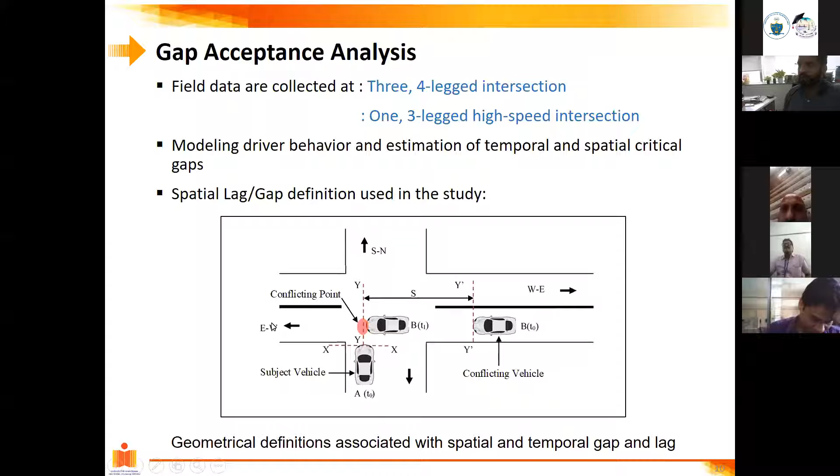Spatial in the sense of space: how far is that vehicle in terms of distance? Now, please understand why people focused on time gaps. A time gap inherently takes care of speed and distance, right?

So when you say some vehicle is going to take 3 seconds or 4 seconds to arrive, that temporal component already takes care of distance as well as the speed of the vehicle. Because if you say within 1 second he's going to arrive, that means he's fast, right? Within 5 seconds he's going to arrive, that means he's slow, or probably he might be at a larger distance.

Now, both the vehicles, if you see, are at different distances, okay? Now, if you see, both the vehicles are arriving at the conflicting point at the same time. I'm repeating again, okay? Both the vehicles are arriving at the conflicting point at the same time. Why is that? Because their speeds are different.

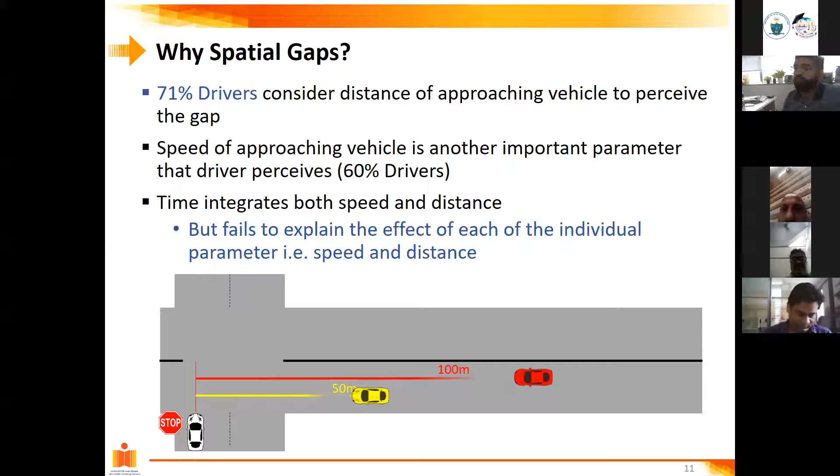Now, how do you do that? It's not that easy. Because finding a temporal gap from a video is quite easy. You fix a camera, then you just find out the time taken by that particular vehicle to arrive at the point of conflict, and at the same time you record the decision of the vehicle at the stop line, whether he or she has accepted or rejected the gap.

So you know the time gap, and you know the decision of the driver, whether he or she has accepted the gap or not. But now you want to record spatial gaps, that too with the speed at which they are arriving. It is going to be tough. Now, how do we do that? There are different ways. We used this approach.

So we recorded videos at different junctions. This is the junction from Kolhapur. It's my hometown, and it was easy for me to take the permissions and collect the data. At this junction, we fixed a camera on one of the buildings, and then we actually marked trap lines on the road.

So we have marked the trap line on the road. Now please understand, when we say we have marked the trap line on the road, that doesn't mean that we have marked throughout the road. We have kept either traffic cones, or we have small white paint on the medians or on the footpath, just to recognize when you look into the video that there is a marking over there, and that marking can be used to actually draw trap lines in your video.

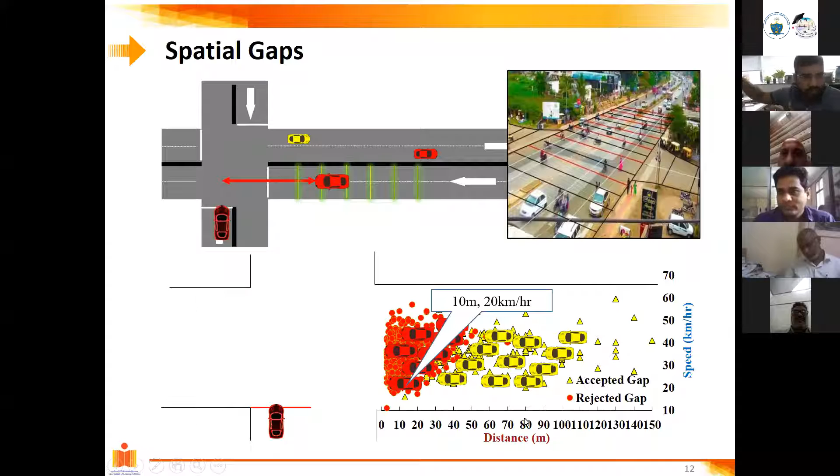Accepted gap means what? Let's take this point: a vehicle was traveling at around 55 kmph and was at 80 meters. There is a vehicle on the approach on a major road which is at 80 meters and traveling at 55 kmph. That gap was accepted by this vehicle. Please understand, this decision is for the vehicle on the minor road. So the data will look like this.

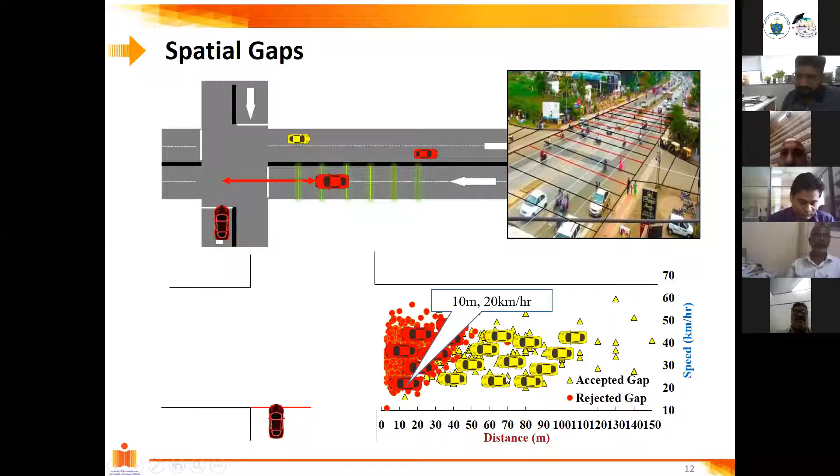Now there are certain complexities when you come across different types of intersection. The first complexity is whether that intersection allows to accept the gap in different stages. It all depends upon whether there's a refuge area at that intersection. What do you mean by refuge area? Suppose you have this median in between. This is the area where vehicles can stop, and they can look for the gap on the left side.

So suppose this car, this subject vehicle, is traveling. First you will go like this. You'll accept the gap by the vehicle coming from the right side. Then you look to the left side and then you will cross the second lane. Now this is very important. If this refuge area is absent, then you have to look for gaps on both the sides. The situation becomes complex, and the driver gets jumbled as well.

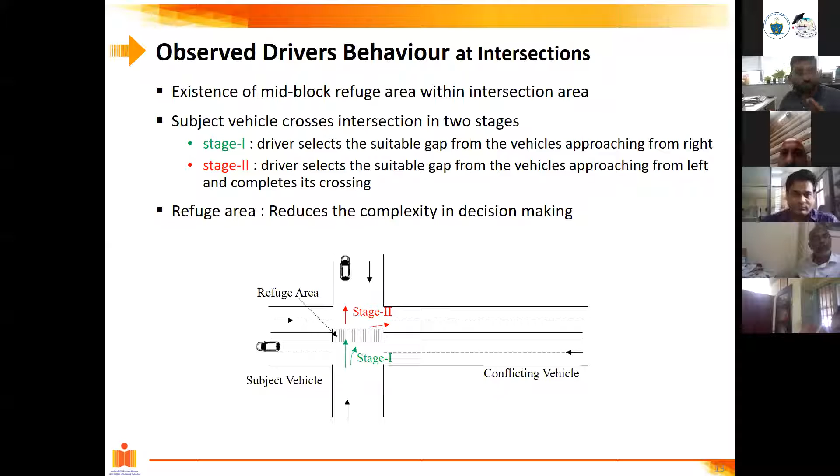You might have seen it generally happens when these kinds of intersections are there on a road network. So you have to be very careful. So we have studied only those intersections which have a refuge area. Now we want to model the gap acceptance behavior. A very simple approach is using logistic regression.

Okay, so it's a binary logit model. Now what is a binary logit model? I think most of you know already, but I will quickly explain it to those of you who probably don't know. Now in a logistic regression or a binary logit model, we talk about what is the probability of accepting the gap or rejecting the gap. What is the probability with which a person is going to accept or reject a gap?

If you're traveling, you come to the intersection, and now you want to decide whether you want to cross or you want to stop at the intersection. Now this decision of yours depends upon various factors. What are those factors? First of all, what is my age? If I'm an old guy, say 70 plus, my decision making would probably be safer. I might think I should wait for a safe gap, a long gap. If I'm a young-blooded guy and just a new learner, I might be a rash driver. I will look for a small gap and suddenly cross.

So it also depends upon the socio-demographic characteristics of the person. Socio-demographic characteristics include my age, even my income. Now you might ask me, sir, how is income correlated to this? Let's talk about that at a later stage. It depends upon my family. Suppose I have my own 5 kids. I might think, no, my wife is waiting at home, my kids are waiting at home, I need to drive very safely.

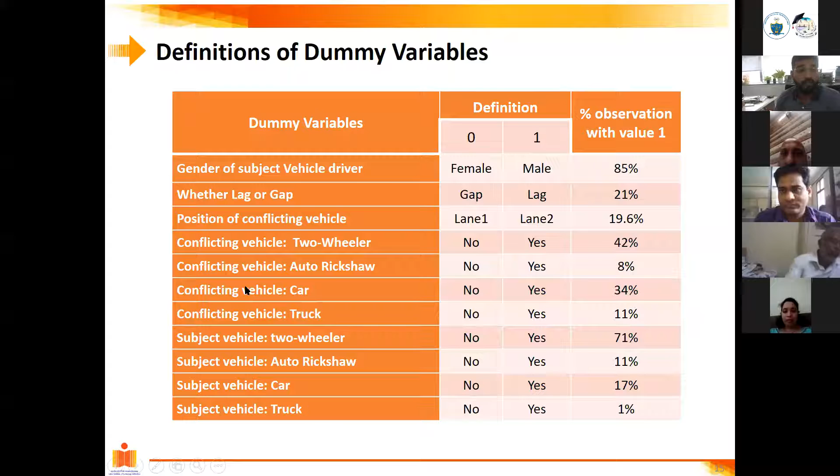Now coming towards the modeling part. When we develop the models, we try with a very simple model. The first thing when we do modeling, we try to understand the correlation between the variables. This is very important, how these variables are correlated to each other, because you don't want to keep two variables which are highly correlated. It doesn't make sense, right? If one variable itself is taking care of the model, why do you want to have a second variable? It's unnecessary and it's difficult to account for as well.

Because the more complex your model is, please understand, nobody is going to use your model. Everybody would like to have a simple model which has variables which can be easily accounted for. Suppose I have a very simple model which needs only one variable. Let's take a random example. You want to find out your income. I'm not doing any kind of Vani Jyotish or what. You want to find out your income after 30 years, and it is completely based upon your income at this stage.

And the model gives the result at 99% accuracy. If I just give my present income, it gives what will be my income after 30 years. Good, everybody will put his present income and try to find out what his income will be after 30 years. But generally it's not that easy. There are various factors which are going to influence all these things, and that's why even modeling becomes difficult.

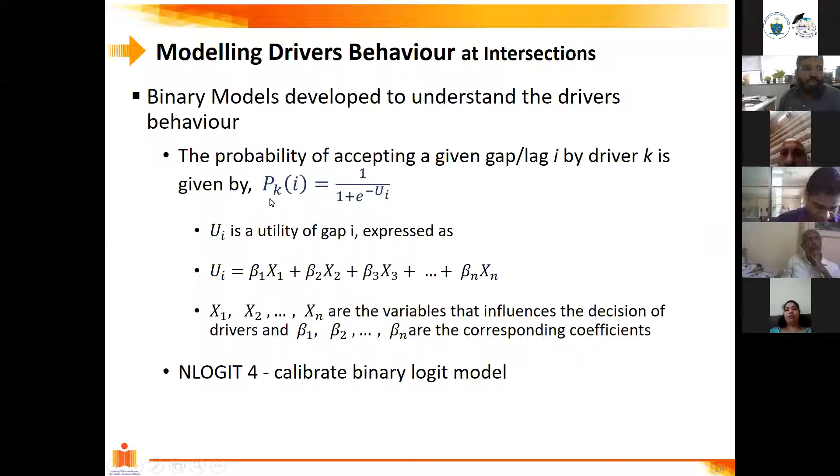Now, second model, we have split time into distance and speed. Now it's very interesting again. Look at this model, very simple model. Please understand this Ui is the utility I was telling, and this Ui comes here, because this is the utility equation. You get a number here. It can be any random value. You put this value here, and then you get the probability. Of course, we all know probability ranges from 0 to 1.

D is nothing but distance. Distance has a positive and significant coefficient, whereas speed has a negative and significant coefficient. Now, what does it mean? Distance positive means the more the distance, the probability of accepting gap is going to increase. Simple, common sense. Minus sign for speed clearly indicates that if the speed of the approaching vehicle increases, the probability of accepting the gap is going to decrease.

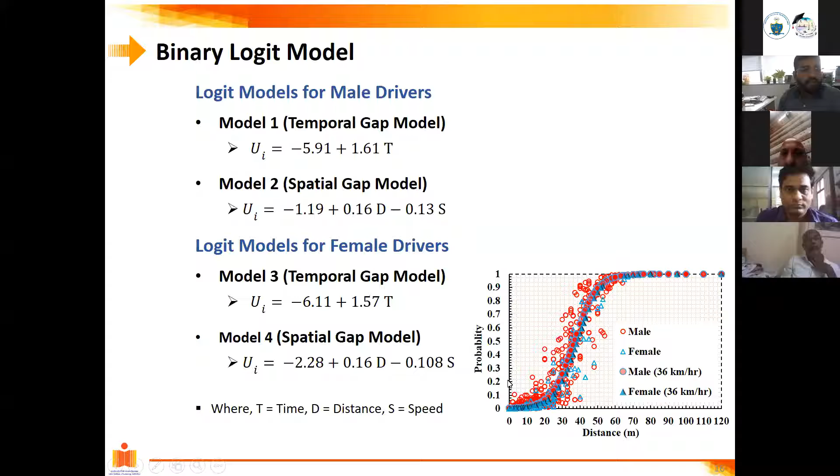Whereas for 60 meters, the probability almost hits 90%. So very simple. That's the beauty of the logit models. You get to know what is the probability of accepting or rejecting a gap for a given variable. Now I'm going to show some complex models. This is the model exclusively developed for two-wheelers.

Now very interestingly, we have observed in the case of two-wheelers, let's look at this model. Suppose a two-wheeler is trying to cross the intersection. Understand this, I'm explaining to everybody. Utility is nothing but a random value you're going to get here, but once you substitute this UI value in the probability, you are going to get the probability. Now let's understand this. What I'm saying is,

this car is nothing but the approaching vehicle, but utility is for the crossing vehicle. And which is the crossing vehicle? Two-wheeler. So we are showing these models for crossing vehicles, for subject vehicles. Now if the two-wheeler is the crossing vehicle and the approaching vehicle is a car, look at the coefficient, it's minus, which indicates that if the vehicle on the major road is a car, the probability of accepting the gap is going to reduce. Similarly for truck also, the probability of accepting the gap is going to reduce. Why? Because you are a two-wheeler rider.

So this also indicates that generally whenever a car or a truck is approaching, two-wheeler riders are more cautious, and that is quite true. It may not be true in some cases. Sometimes you might have seen two-wheelers are quite aggressive as well. They just quickly move. But the model clearly shows that the bigger the size of the vehicle, the probability of accepting the gap is going to reduce.

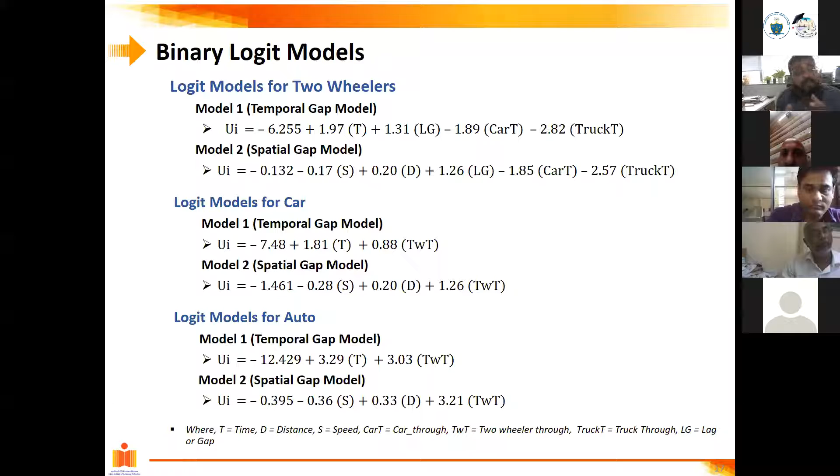Interesting. Now look at the second model, developed for car. It shows a positive and significant coefficient for two-wheeler. That means if the approaching vehicle is a two-wheeler and you are in the car trying to cross the intersection, your probability is going to increase because you are going to dominate over that two-wheeler. And generally that happens. When you are in a bigger vehicle, you generally dominate over the smaller vehicles. So even this kind of behavior can be captured in the models, and we have captured it.

Just to give an example in layman's language, let's see a very simple graphical representation. Two-wheelers and auto rickshaws accept smaller gaps than cars, and this is very true. Many times you are waiting in the car at an intersection, and suddenly a two-wheeler fellow comes beside you and crosses the intersection, but you are not able to cross it. You might have observed this. Or suddenly an auto rickshaw fellow comes and crosses the intersection, but you don't, because you are in a bigger vehicle.

So just to give an example, let's take a gap value of 45 meters. For a 45 meter gap value, the probability of accepting that gap for car, which is this blue, is just close to 10%, 10-11%. But for the same gap value, the probability of accepting the gap by a two-wheeler or an auto rickshaw is almost 80%. And that is true.

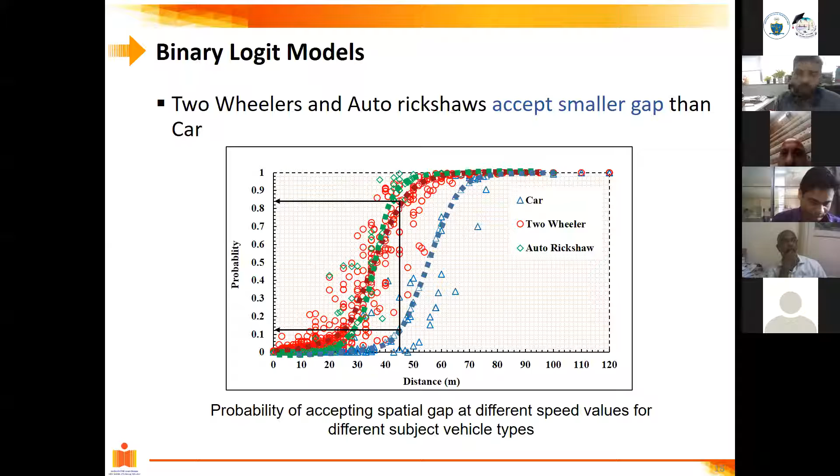In India, auto rickshaws and two-wheelers are quite aggressive. I think most of you people drive also. You have seen two-wheelers and auto rickshaws are quite aggressive while driving, right? So this is also captured in the models that we have developed. Then we talk about lags and gaps.

I told you initially what we mean by lag. Lag is nothing but the first gap. Now, if I take a lag of 4 seconds, the probability of accepting a lag is slightly higher than the probability of accepting a gap. There is a reason for this. I'll explain. Lag is nothing but the first gap. Quite often, whenever you are approaching the intersection, you are already in a state of motion, okay?

And then you are already making a decision. Now, there is a difference between a decision-making process when somebody is stopped and when somebody is already in motion. Now, what happens, that motion gives you a confidence that you can easily cross that intersection. That means you can quickly cross that intersection because you're already on a bike or in a car, you're already moving. You look for a gap, you look for a vehicle coming. If you're already moving, suddenly you tend to cross.

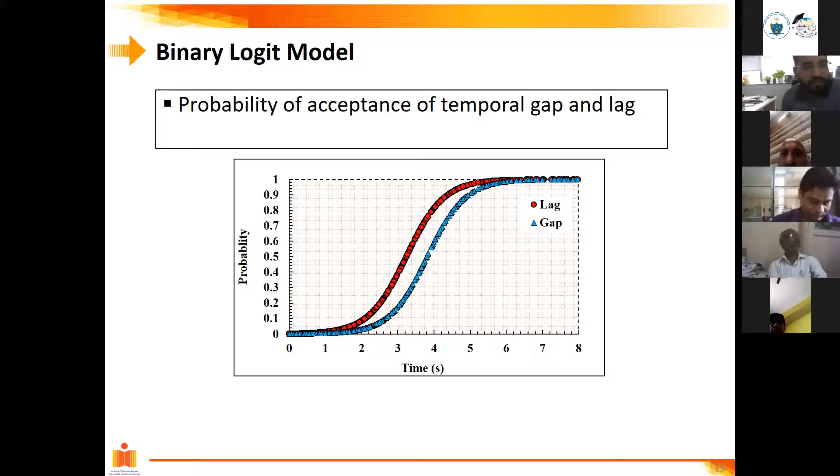So that's why the first gaps have to be treated differently, because quite often the vehicles are already in state of motion. But in case of stopped vehicles, a person has to start the vehicle. You have to put in first gear. If you're on a two-wheeler, you have to put a first gear, then you have to accelerate. So you have to think of all those dynamics, okay? And the decision-making process completely differs when you're already in state of motion. That's why we analyze this gap acceptance behavior separately for lag as well as for gaps, okay?

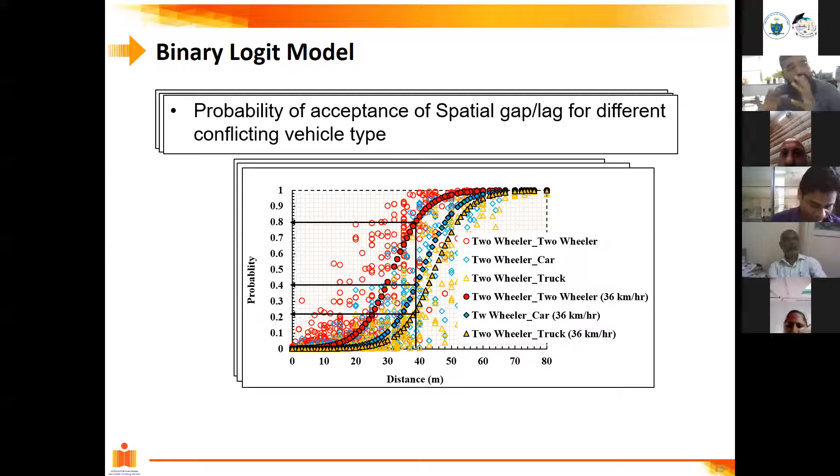So very important. Now let's go to the spatial gap acceptance with respect to vehicle interaction. This is very interesting, okay? Now when I talk about vehicle interaction, what exactly do I talk about? I talk about interaction between two-wheeler and car, two-wheeler and truck, two-wheeler and two-wheeler, and so on, okay? So for example, if a two-wheeler is waiting and the oncoming vehicle is also a two-wheeler, then what will happen? We have shown here in this graph. If a two-wheeler is waiting and then a car is coming, then what will happen? So these kinds of interactions can also be modeled, okay?

Now, we understood that gap acceptance behavior is all about all these aspects, okay? Trying to understand what size of gap is acceptable, what size of gap is not acceptable, and so on. Now there is one size of gap that is very important for us, and that is called the critical gap, okay? Now theoretically, I am not saying practically, theoretically critical gap means it's one size of gap which is acceptable for most of the population. Means what? Means if I tell that 4 seconds of gap is accepted by all the population, I will call that gap value a critical gap.

But then how do you arrive at that critical gap value? How do you arrive at that single value? Now there are several ways of doing it, okay? There's Raff's method, given by Raff, and he has given this close to the 50s, 1950. It's an old method. Thereafter people used logistic regression, people used the maximum likelihood method. Recently we came up with our own method, which is based upon support vector machines, okay? Very interesting. I'm not going to cover that part though.

So I'm going to tell you what is critical gap, okay? So it's a size of a gap whose number of accepted gaps shorter than it is equal to the number of rejected gaps. So this is the definition given by Raff. Now what he says is, I'm simplifying. Look at this graph, okay? It's the intersection of the rejected gap graph and the accepted gap graph. He defines it in such a way that it is the point where the number of accepted gaps is equal to the number of rejected gaps. Very simple. See how nicely it has been defined.

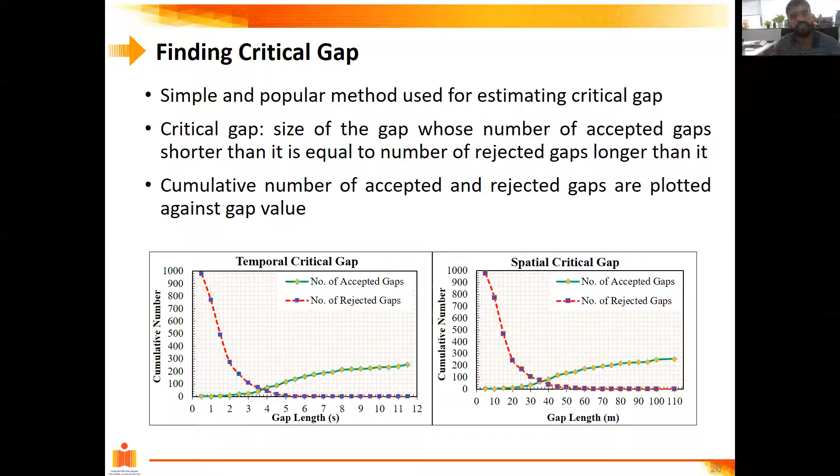If you talk about intersections on national highways, those intersections can be called high speed intersections because vehicles are approaching at higher speed. But our intersections were low speed. That's why if you look at the gap values, they are quite smaller: 3.8 seconds and 36 meters. Now these are the models which we developed. I explained this model to you.

In the previous models, we just accounted for a single vehicle type. But in these models, we have accounted for the interaction between the vehicles, meaning two-wheeler interacting with truck, two-wheeler interacting with two-wheeler, two-wheeler interacting with car. Even this kind of model can be developed.

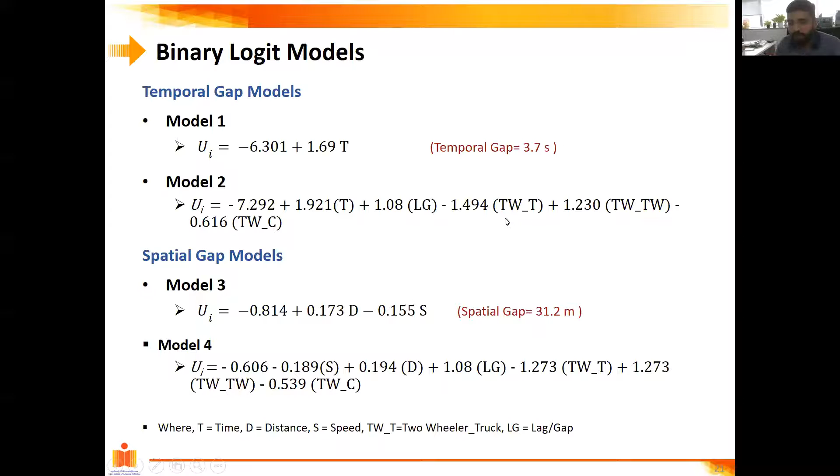And then when you actually use different techniques, there are different values you will come across. But more or less, the average value would be similar, even by using different methods. Sometimes it may vary. Then you need to look into why that is happening. So we used different techniques. We used Raff's method, logit method, maximum likelihood method, and then we found this is the value of the gap.

Then let's find out which value is the best. That is again based upon the literature review. You try to see which model is more reliable, and then you select that. So we chose 3.68 seconds. Now, the Highway Capacity Manual, the manual given by the US, gives values of 5.5 seconds and 6.5 seconds. So look at our values. Our values are quite less, almost 1.5 seconds less.

That means our drivers are quite aggressive. And it's true actually, Indian drivers are quite aggressive. That's why it's very important to understand the gap acceptance analysis.

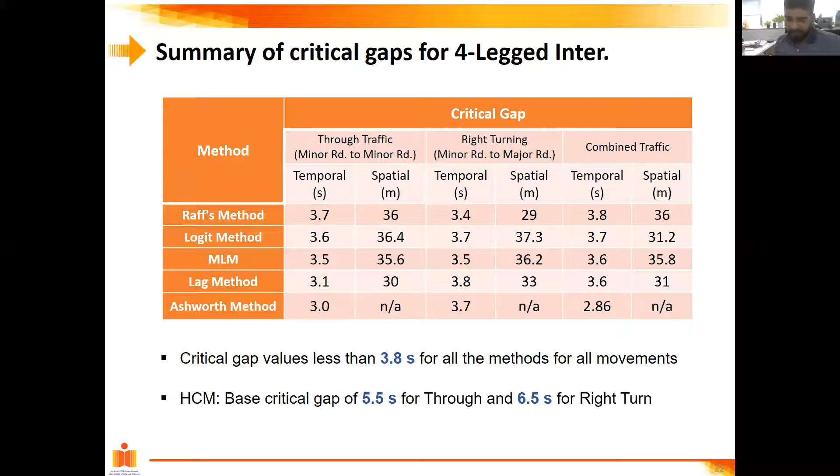Now I have a video to show. I guess I won't be able to run the video. Maybe once I finish, I can show this video. Hold on for some time. Rajan, can I share a video? Yes, sir, you can share. Rajan, how much time do I have? We have 20 minutes. Perfect, that's good enough. You will have to share the screen again. Yes, I'll do that. So Rajan, now is it visible?

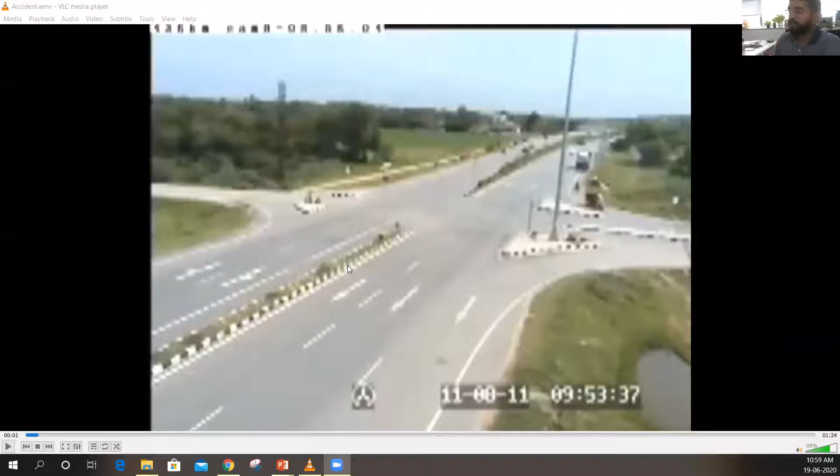Yes, it is visible. I think this video is quite famous. Some of you might have come across it. It's not clear, but still I will play this video. It may be slow in some of your cases. Now look at this. There's a two-wheeler coming from this side, and there's a car coming from this side. This is captured on a CCTV camera. And look at it. A vehicle coming from the wrong side, completely judging the gap in a wrong way.

There was a two-wheeler coming from this side. Now look at this two-wheeler. He's trying to cross and he misjudged the gap. Again, there was an intersection. Now look at this bus. This bus is trying to cross. He did not judge it properly. There is a complete collision, there is a crash. Look at this two-wheeler trying to cross. There's a crash. Trying to cross.

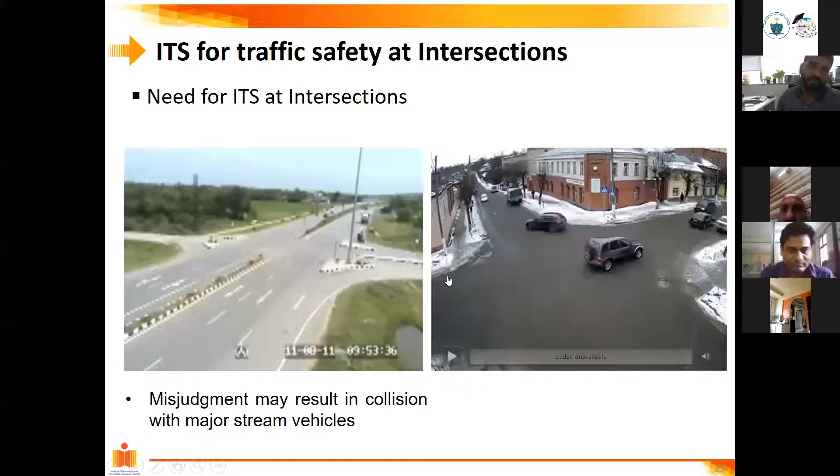Has it? Yes, sir. So all these crashes are at intersections, and they are crashing into each other. This clearly indicates that intersections are complex. The decision making at intersections is not that easy, and therefore we need to give some assistance to the drivers when they come across intersections.

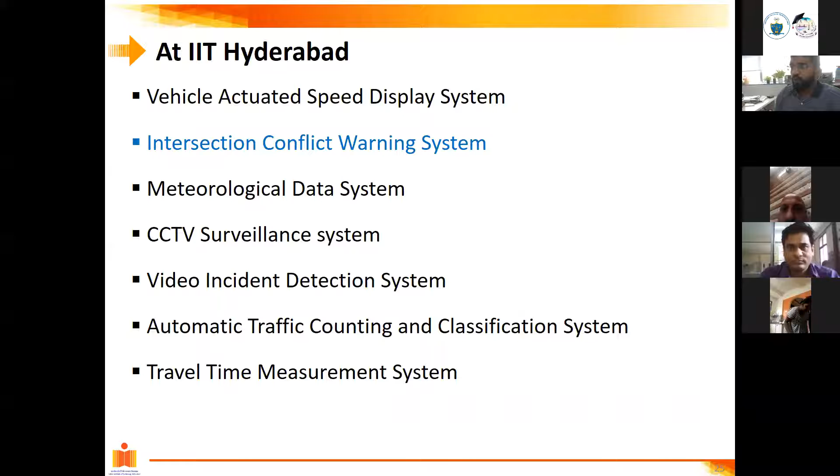Now there are of course several ITS applications. One such application is the intersection conflict warning system, where you warn drivers in advance whether to cross or not based upon detection. You detect the vehicles on the approaches at the intersection, and then you give this information to the driver on another approach. So, several ITS technologies that we have deployed.

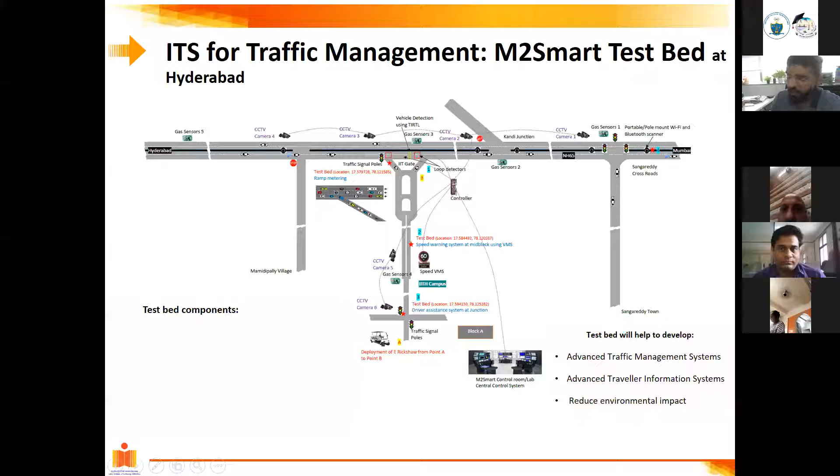And then inside the campus, we developed an ICWS, that is intersection conflict warning system, which I'm going to talk about. So this is the intersection, one of the intersections inside the campus. What we have done is we have come up with new signages. We assured ourselves that it won't deviate from the standards given by Indian Roads Congress. So we maintained those standards. Add on to those standards, we have used some text messages to inform drivers about the vehicles on other approaches.

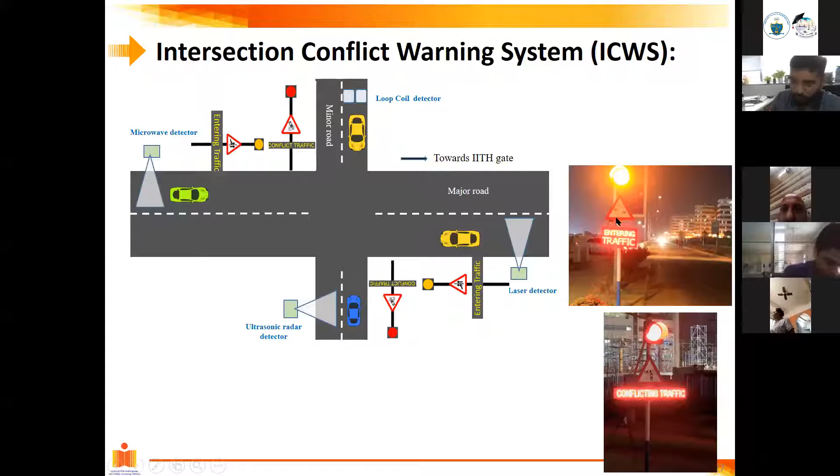Now there is a difference between these two signages. One is amber, one is red. Red is for the minor approach, amber is for the major approach, because we don't want the vehicles on the major road to stop. This is how it looks in reality, in the field. It warns you in real time.

And as I said, while merging on the highway, this is the National Highway 65. This is our road which is merging. It's a ramp which is connecting to the National Highway. If you look at this, there is a detection system which we have deployed on the National Highway.

It is based upon the loops. It's a loop detector. You can see here we have laid the loops on the road. Once the vehicle arrives on this, okay, it will detect. So I can actually show you in real time also.

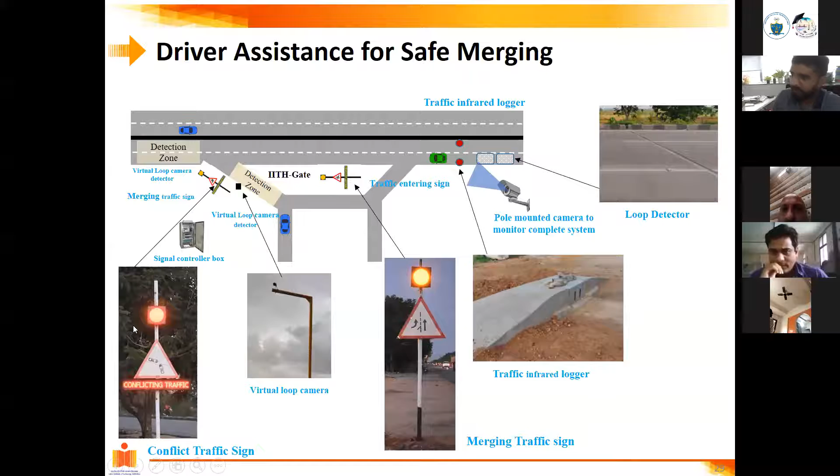I didn't think of this. Suddenly it came in my mind that I can actually show you in real time as well. So let's see in real time also. Give me some time. First, let me finish this part.

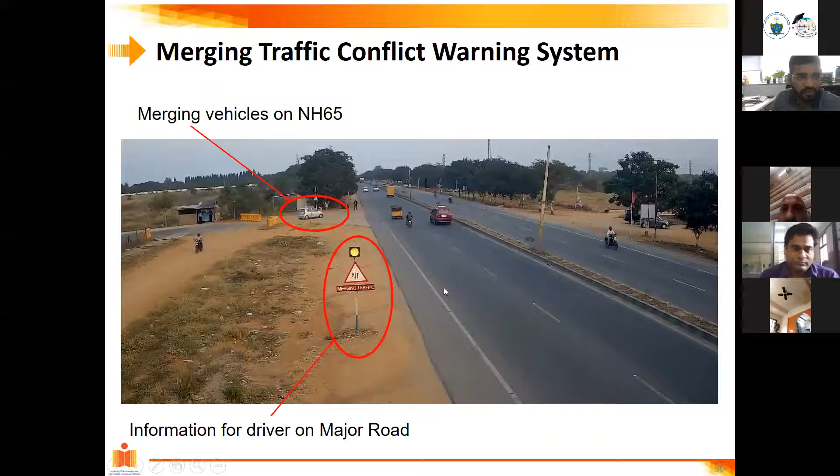So this is how it looks. This is the National Highway, okay, and there's a vehicle actually entering onto the National Highway, and it warns in real time. It tells all these vehicles that there's a vehicle actually entering. So it's a cautious message to the vehicles on the National Highway as well. And I will show you how it actually looks like.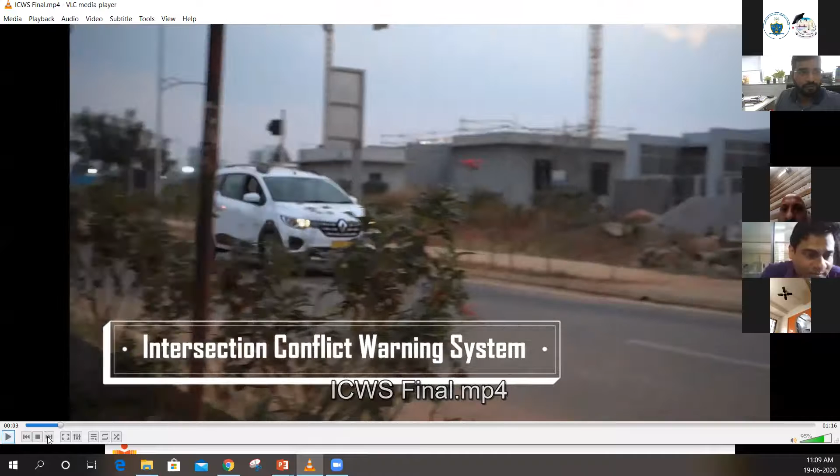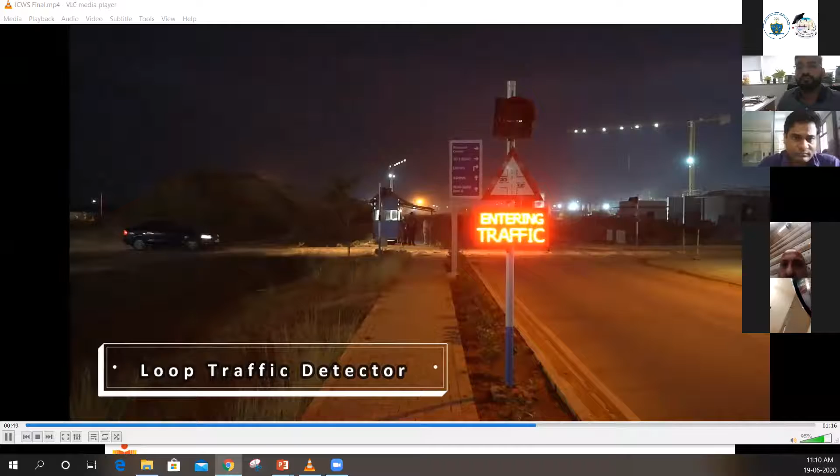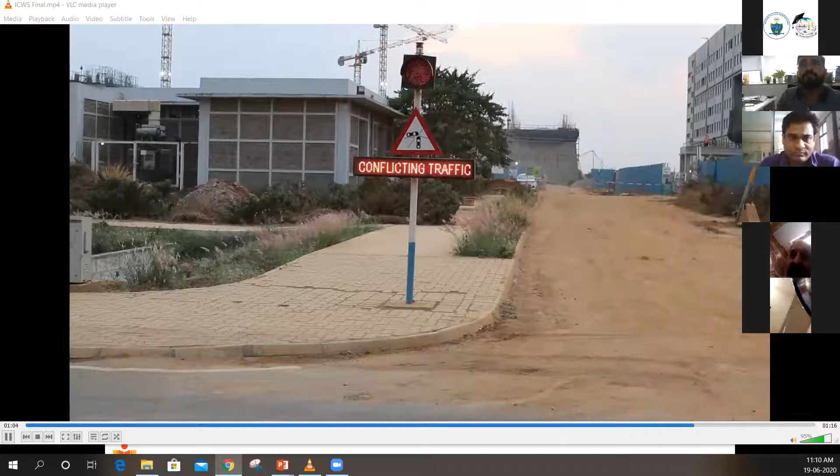So Rajan, is it visible? Yes, sir, it is visible. Yeah. Yes. Yeah, so just a minute, Rajan.

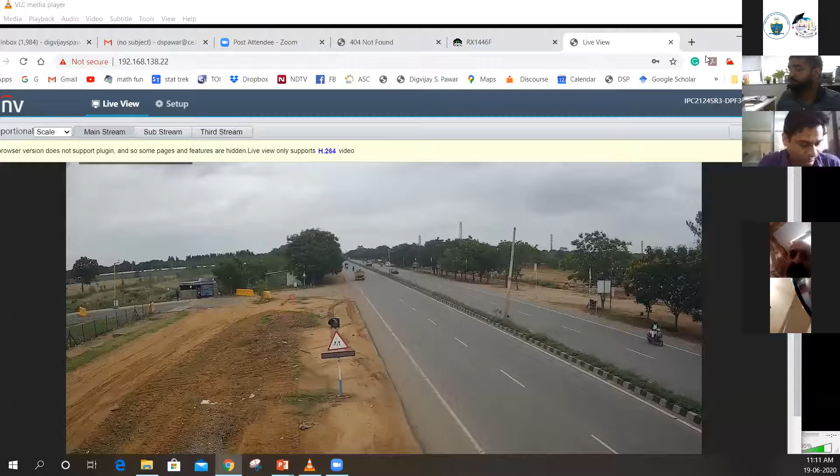I'm trying to access the CCTV camera live, okay, so that I can give them the demo. So this is a live video, actually live feed. Okay, I'm accessing from my office. Are you able to see, all of you? Rajan, are they able to see? Yes, sir.

It is visible. Yeah. Now, on the same highway, actually, day before yesterday, we had an accident. One truck fellow went onto this pole. He's saying that he was sleepy, and he completely went onto this warning system, and then again we erected it. So we have also deployed one sensor on this national highway.

Here there's one sensor called as Turtle, which is based upon the laser technology. I'm accessing that as well live, and I'm going to tell you how it detects the vehicle. So this is how it detects the vehicle. See, all of you try to see this carefully. So this is the count. Currently, vehicles are passing on the highway, and you can see there is a count on the highway.

Can you see, just now a two-wheeler passed? The speed of the two-wheeler was 42 km/h. It's live streaming. Okay, it's streaming live now. But I can just cross verify this. I can show you even with the video on. So let me do this thing. I will keep video on one side.

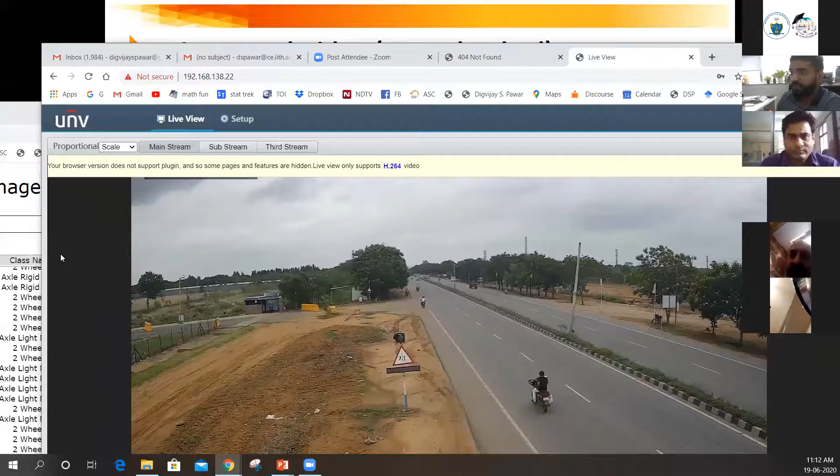Can you see both my videos? Both this thing? Rajan, can you confirm? Rajan, sir, is it visible? Yes, sir, it is visible.

So for example, this two-wheeler is going from wrong side. See, this two-wheeler went from wrong side. So here it will come, two-wheeler. Look at this arrow direction. It is on wrong side. Can you see that? And it traveled at 53 km/h. That speed he is traveling.

Now, for example, car went, see, light motor vehicle. And you can find out even speed. The car went with 63 km/h. Then, see, there is a three-wheeler, means rickshaw, and there's a two-wheeler. Again, one two-wheeler went. Again, two-wheelers went. See, you can see here their detection.

So it's currently online. I'm actually showing you in real time the detection, the speeds, in which lane they're traveling, in which direction they are traveling, everything can be detected. So this fellow went very high speed. Can you see that car just went? It went with almost 100 km/h. You can easily see that. Look at it.

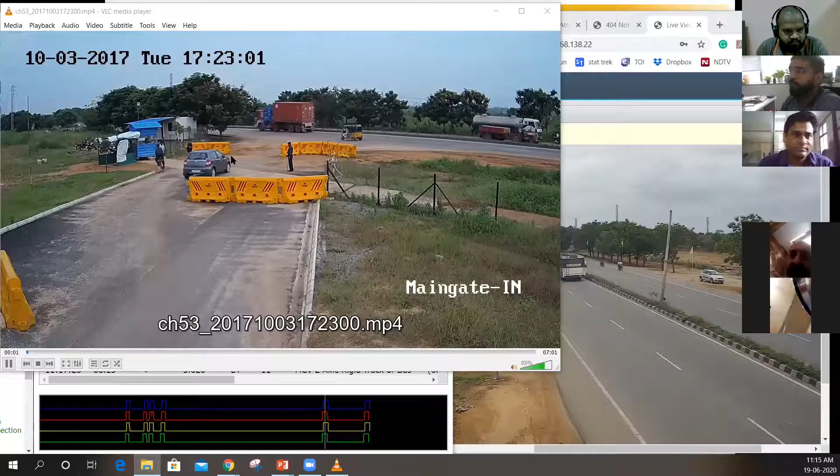So this is the accident which happened while exiting. Okay, I don't know if it is wrong direction or what. This merging happened very drastically, and suddenly that rickshaw toppled. You can see there's a rickshaw which came and it toppled. There was an accident here. Okay, so there's a problem with the merging. Okay.

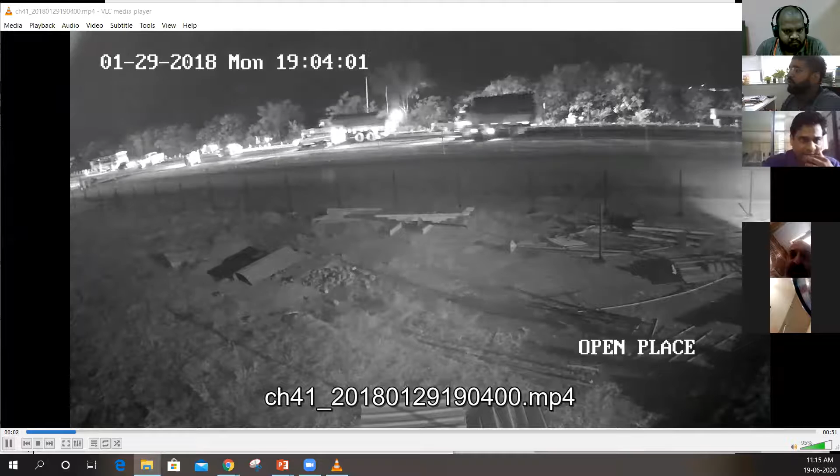So there's a nighttime one; what happened is one fellow actually crashed onto pedestrians. Okay, so we are actually able to track all the accidents in live. Okay, so for example, now let's see a wrong direction accident.

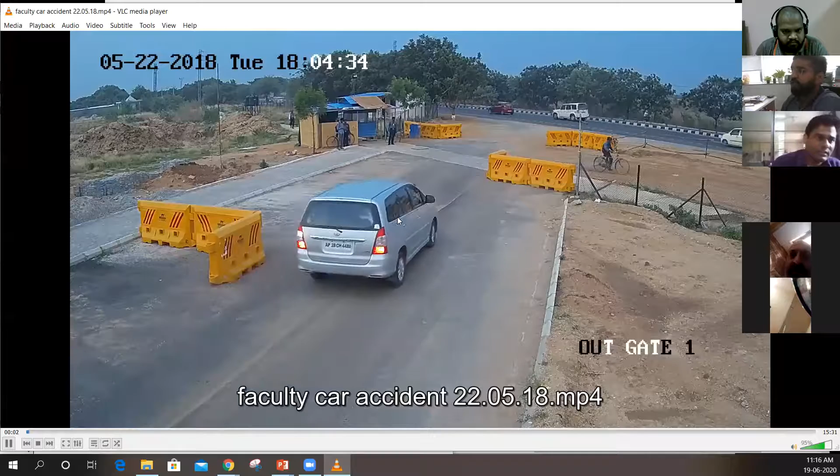Okay, so this is the vehicle which is trying to cross, and now there will be another vehicle which is coming from the opposite side. See, there's a vehicle which came from the opposite side, and then there's an accident on the highway. This is on the highway, by the way. So like this, you'll come across several incidents which you need to capture and you need to understand.

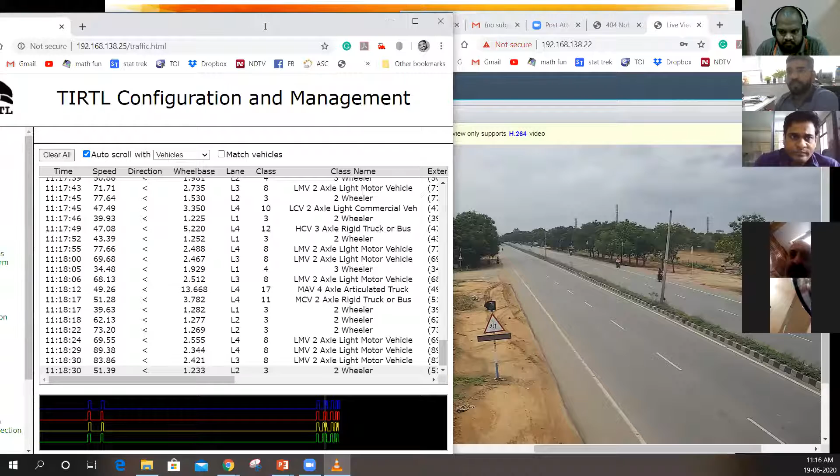Okay, so now this is how it works in live. I told you about vehicle tracking. Looks like there is no vehicle exiting from the campus, and that's why this is not on. But this is how it works actually. So you can see here one pole. Can you see, all of you? I don't know if it's visible on your screen or not, but there's a yellow pole here. And this pole is actually fitted with one sensor at the top. This is a virtual loop detector.

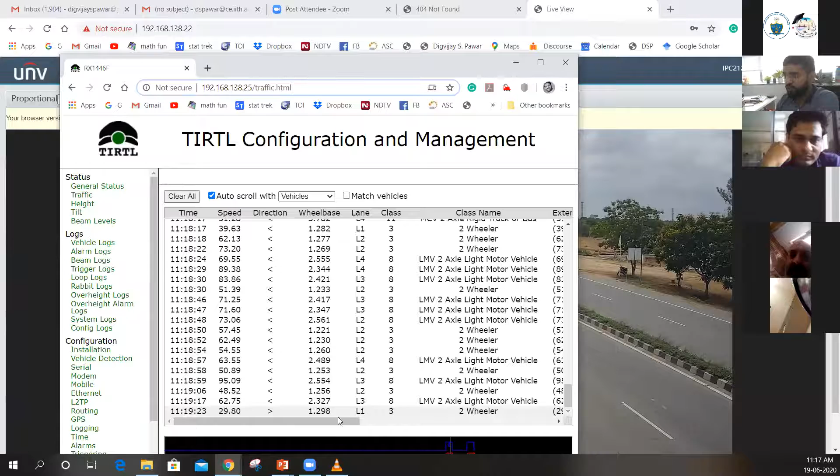Now this sensor detects the vehicle which is coming from this side and actually displays it here. Okay, so see, this is again one fellow going in the wrong direction, and he will be detected here. See, this two-wheeler went in the wrong direction. See, this arrow changed. That means this two-wheeler went in the wrong direction. Speed was 30 kilometers per hour. So likewise, you get to know several things. Okay, I'll move on to the presentation part.

See, this vehicle came and now it is blinking. Can you see that? In the video it is not clear, but this vehicle came and it started blinking. It may be visible to all of you. It is blinking because this vehicle is merging, because it is detected actually.

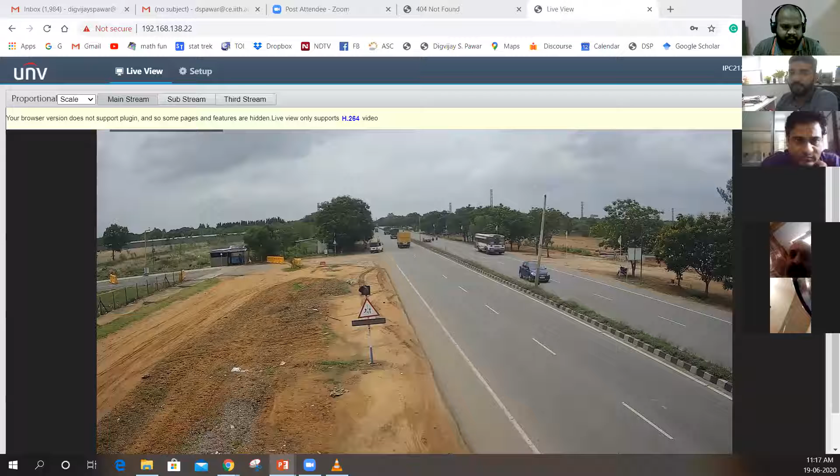So, however, this is the last slide, Rajan, and thereafter we can move on to the question answer session. Okay, there are several challenges. It's not that easy to deploy these kinds of things. What are those challenges? First one is the slow infrastructure growth compared to the growth of vehicles. The rate at which vehicles are getting added to Indian roads is drastic. Though we consider it as 7 or 8% in our calculations, the actual rate is too high.

Okay, now the purchasing power has gone up. Anybody can buy a car. Buying a car is not a complex task. If somebody even earns 30,000-40,000 per month, buying a car or a two-wheeler has become easier because you get loans; banks facilitate you. So the rate at which vehicles are coming on Indian roads and the rate at which infrastructure is developed, there is no match. The pace is not matching. So a lot of focus has to be given to infrastructure as well.

Okay, second thing is the non-lane based chaotic traffic, largely different from western traffic. This is something very difficult to account for. The chaotic, non-lane based traffic: people don't follow lanes, people come from the wrong side. So it becomes an additional, complex task to account for in the modeling. ITS used for efficient traffic management in developed countries cannot be directly used in India. We can't use the technology directly from the Western world. We need to have our own technology because our requirements and situations are totally different.

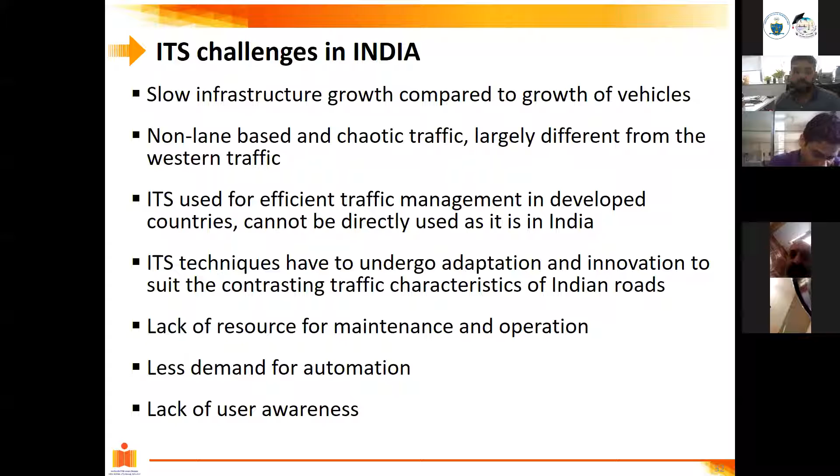And then lack of user awareness. Once you have it, we need to make people aware. User is nothing but all road users. If I'm walking, I'm a road user. If I'm using a bicycle, I'm a road user. So whoever is using the road should be aware of the technology which you are adopting.